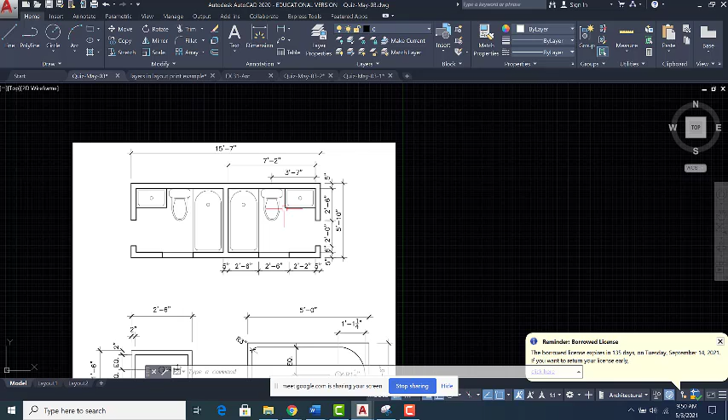Okay, so if I want to do this specific drawing, first of all, I spend a little bit of time to see which way is faster. Okay, to me, probably the fastest way is if I draw just a small rectangle inside, then I offset it outside. Why? Because I don't want to sit and calculate. I can calculate 7 feet 2 plus 5, but if I go with the inside, it's really simple.

See, 7 feet 2 is x, and y is, actually I have to calculate here, is 5 foot 10, but it's really simple. See, 5 and 5, 10. So basically 5 feet 10 minus 10, it's 5 feet. So the inside rectangle is 7 feet 2 by 5 feet. So I start the rectangle, so 5 feet, sorry, the x is first, 7 feet 2, comma, 5 feet.

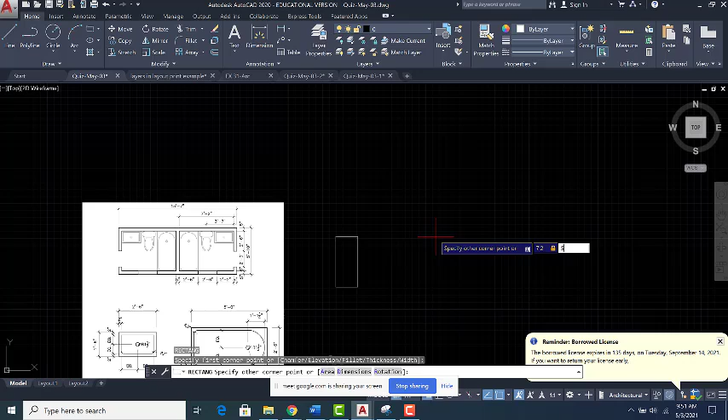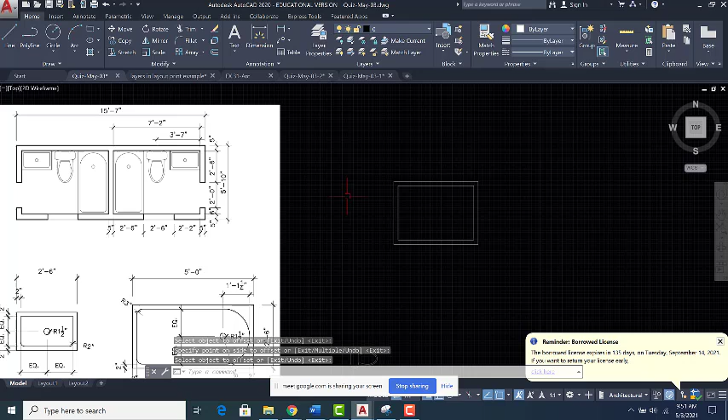You can draw it with line. If you draw it with line, it has some advantages, but it doesn't matter. I just did the rectangle. Then what I can do, I can use offset 5 inch, and I offset this one like that. So as you can see here, because when I want to mirror this thing, it's much easier if I draw the whole line.

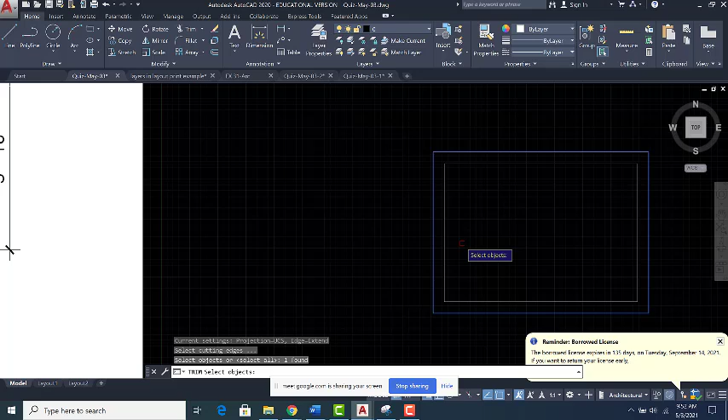Okay, so what I would do, I would delete this line. So trim, select this one as my cutting edge because it's polyline, everything is selected, accept the selection, and I just get rid of that part for now. Later on I delete one of this line too. So now I have the overall. Then what I have to do, I want to find this opening. How can I do that?

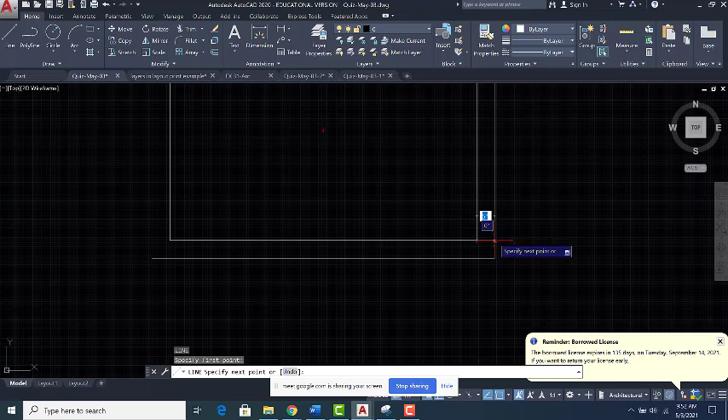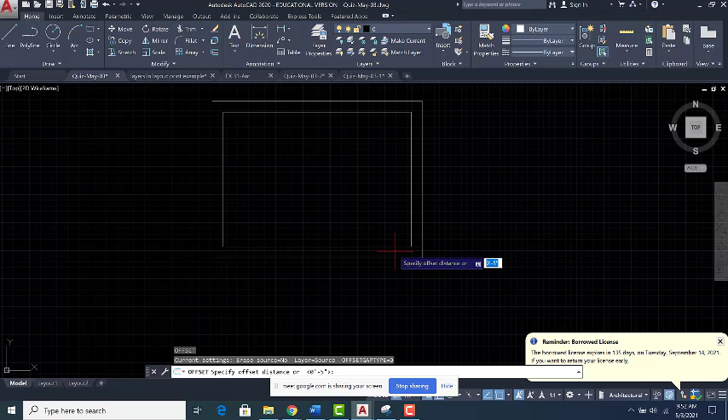Remember, we can easily draw a guideline here. Make sure, please guys, zoom in, grab the endpoint, make sure it's perpendicular, make sure the ortho is on for this part of the drawing. So I have this corner now. If I offset it 6 inch, I would have the start of the opening. Offset 6, I offset this one here. Press spacebar to cancel the offset, press spacebar again to start it.

So then the opening is 2 feet or 24 inches. Then I offset this one there. So see, I have the opening. Immediately I delete this one. I use TR, trim, and I select my cutting edge, accept it, and I get rid of this part. Then I go here. Again, to find this corner, I just draw a line.

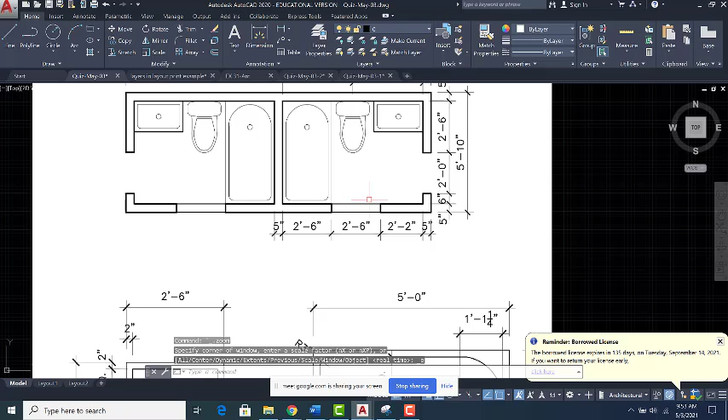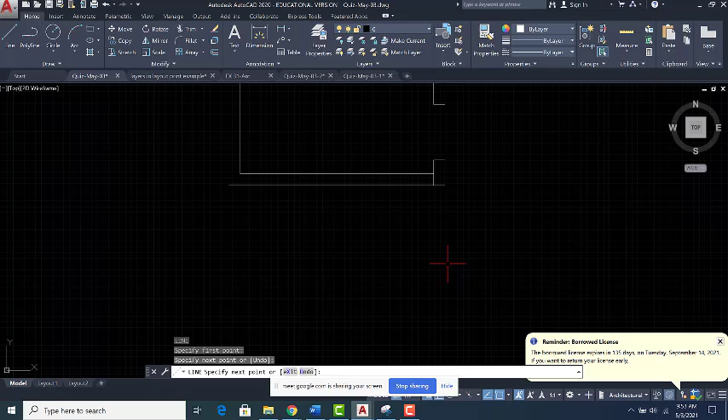See, because I used the rectangle, I cannot offset the line. If I did it with line, I can easily just offset the line and it gives me this one. But it's fine, it's pretty simple. I just draw a line from here, then I offset it. The first one is 2 feet 2, accepted, and this is this. Press spacebar to cancel, press spacebar to start it again. 2 feet 6, and here you go.

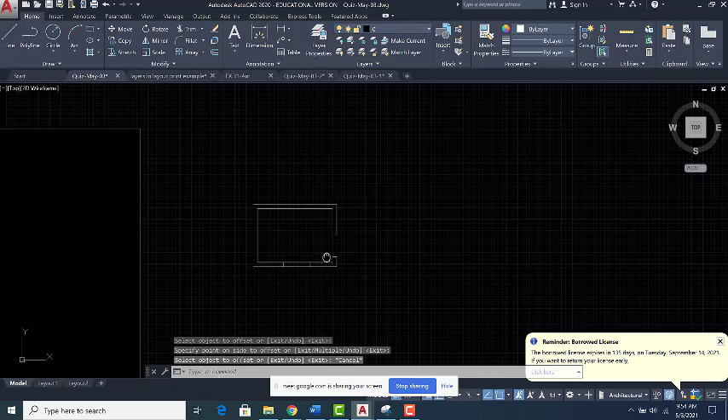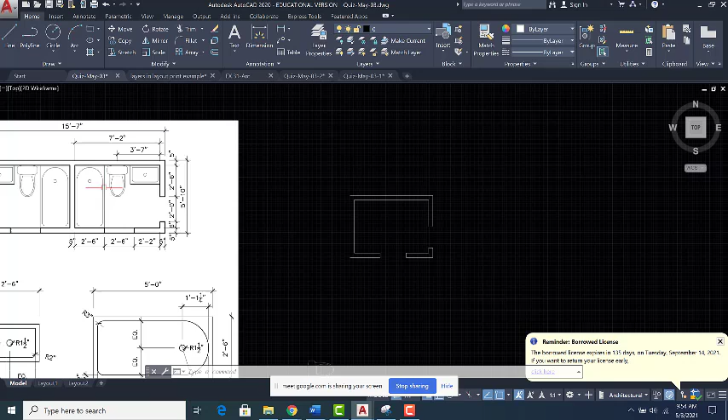So now I have the window, trim. See, I open the window to select the cutting edge, and I trim it. E, spacebar, and I erase this one. So I have my openings. Now I have to just draw these two parts. So I go here so I can see it easily. For this one, for sure, rectangle is the best.

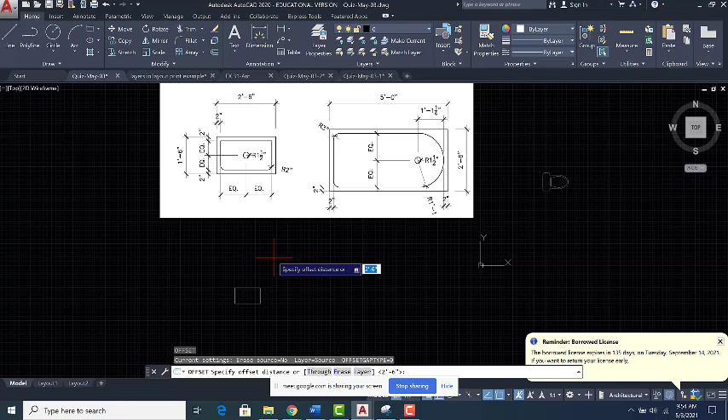The first number is x, so 2 feet 6, comma 1 feet 6. This is the overall. Offset 2 inch. So make sure your offsetting is inside because I did the outside. Then I have to use fillet to make these two arcs. So F spacebar. Remember, because I have a specific radius, I have to change the R. So I just type R spacebar, and I just type 2 enter or spacebar.

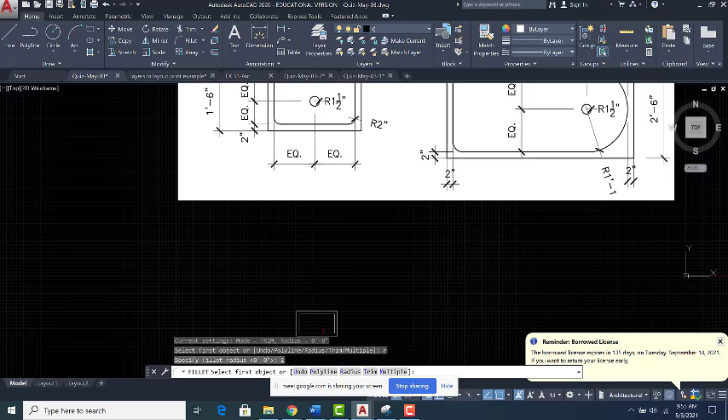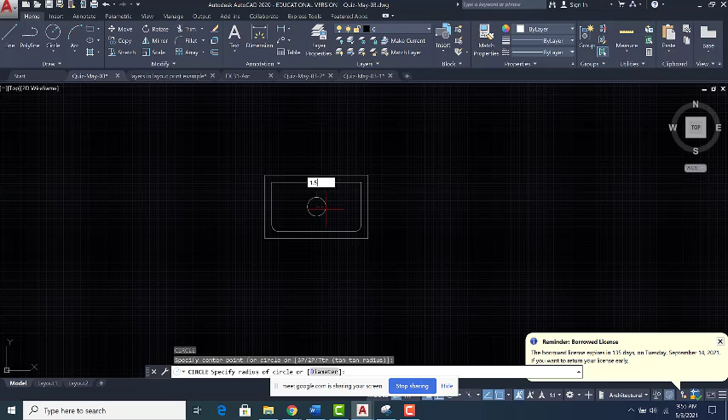Now because I want to do it more than once, it's better if I just select multiple. Then I can go ahead and select these 2 lines, these 2 lines. So I'm done with this. The only thing missing is the drain. The drain is 1.5. So C spacebar, and see I just move my hand here to find the center, 1.5. So I'm done with this. M to start the move, select the object, press the spacebar to accept the selection.

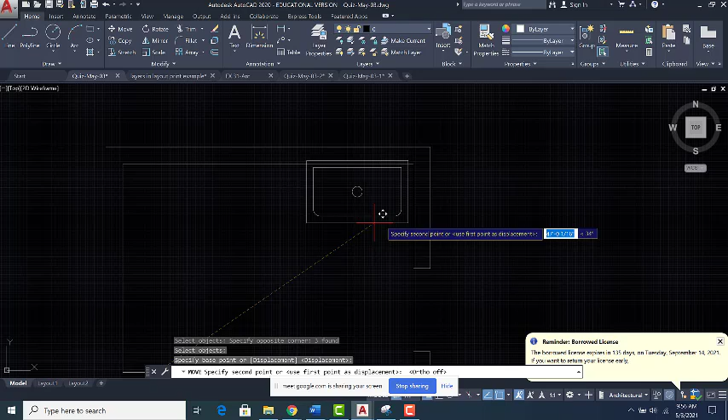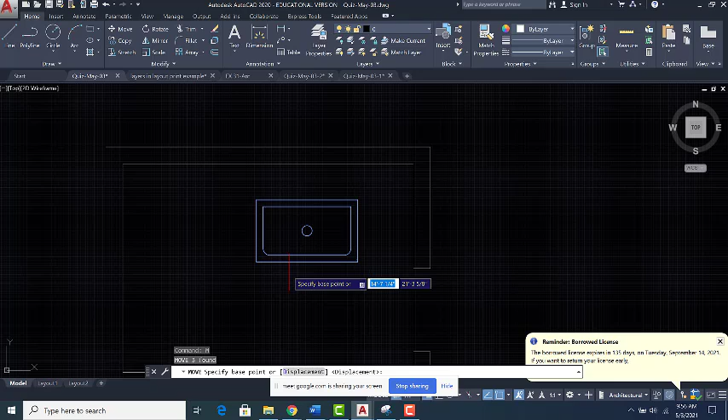See, this is crucial. Do not trust your eyes. Do not just grab it from here and try to place it somewhere. There is no way that you can place it. When you are moving any object, you have to select the right base point and destination point. What I did here, I select the object first, then I just type M, spacebar, so it makes it easier. There is no more select object. Then I grab the endpoint and I put it to the endpoint.

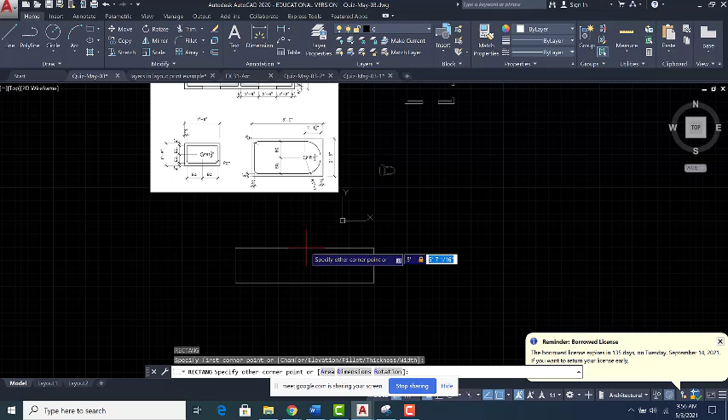So this is done. I go to make the bathtub. So rectangle again. This is 5 feet, comma, 2 feet 6, enter. As you can see, again, I have 2 inch on all sides. See, 2 inch, 2 inch. So what I can do, offset 2 inch, go inside.

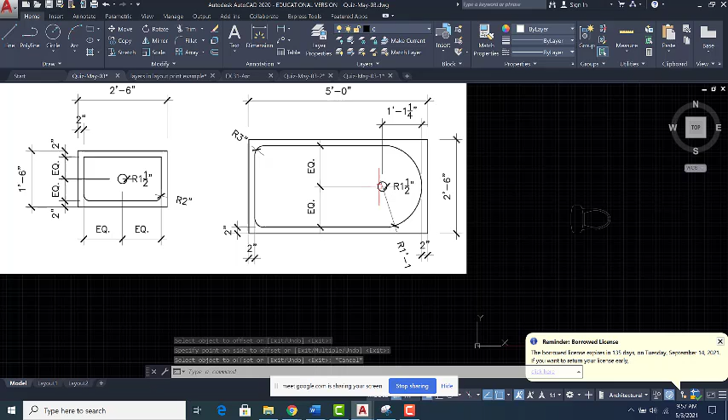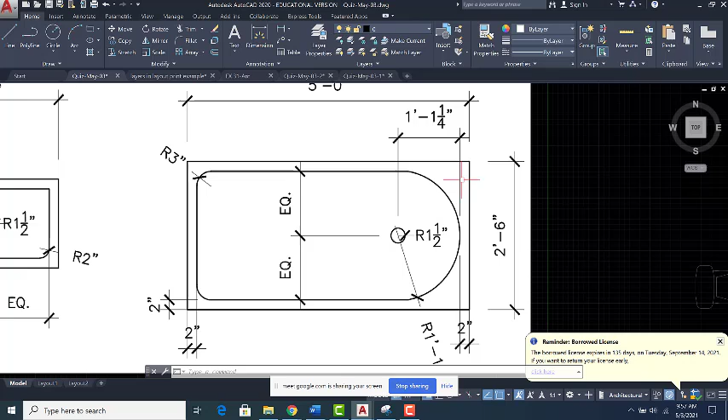Then what I can see here, see this, the drain and the center of this arc is the middle of this line. So I can just draw a line as a guideline. See, grab the midpoint and I just draw it like that. Then the next thing I need to find is the start point for the center. I know that the center is 1 foot 1 and a quarter inch from this point. So what I would do, I just draw a guideline. See, I usually draw it longer so it's easy to delete.

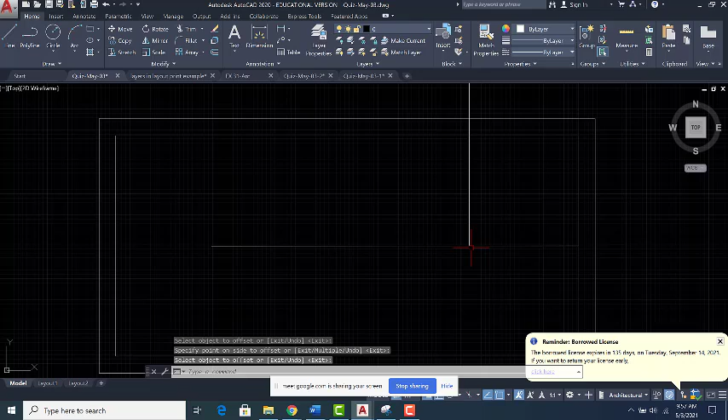Offset 1 foot 1.25 and I offset this one here. So this is the center for the circle. So C spacebar, I grab here, the first point is center and this is the radius. So now I don't need any of these guidelines. I delete them. Then I use trim.

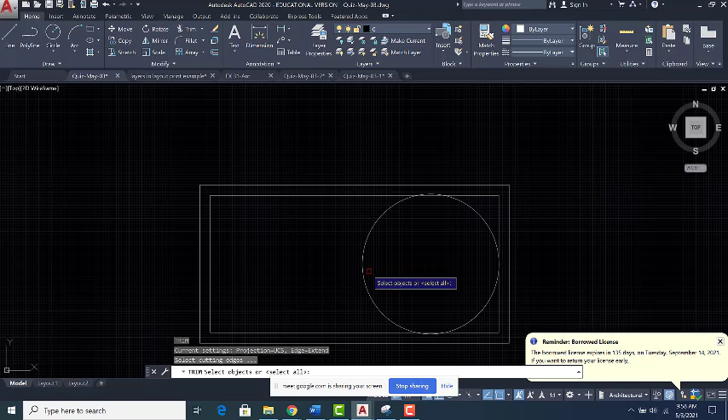So the cutting edge is this rectangle. Accept it and I just delete this part. I don't need this part and I don't need this part. So now I want to get rid of this extra part. The last command was trim. If I press spacebar, AutoCAD repeats it for me. So now this is my cutting edge. I press spacebar to accept it. Then I just go ahead and delete these 2 extra pieces.

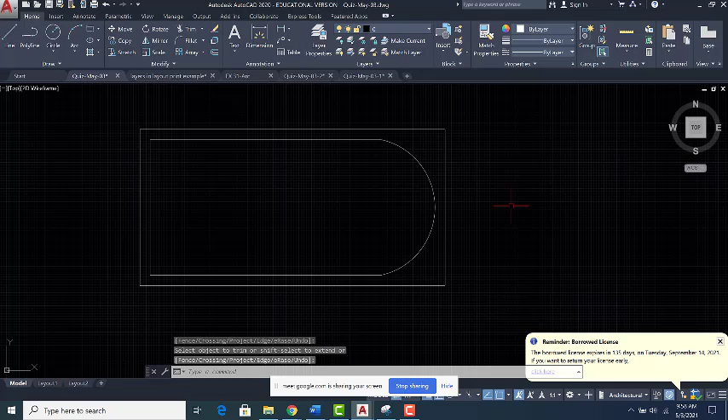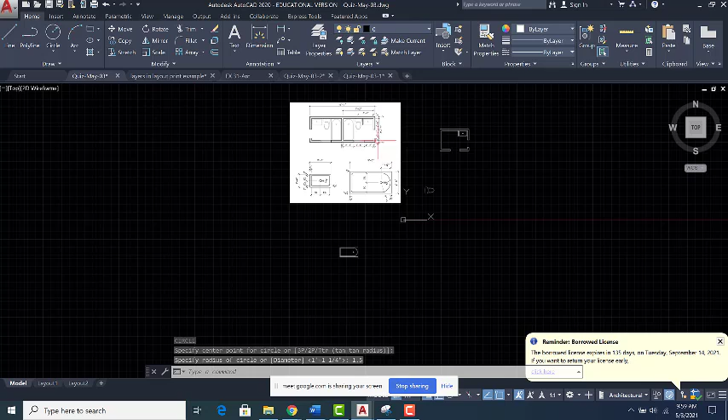I'm done with it. I just have to add the drain. So C spacebar. I place my hand on the perimeter of the circle to find the center of it, and 1.5, and this is the drain for this one. The only thing is I have to rotate it. So RO spacebar, select the object, press spacebar to accept it. So it doesn't matter where I select the center of the rotation, okay? I can even click anywhere.

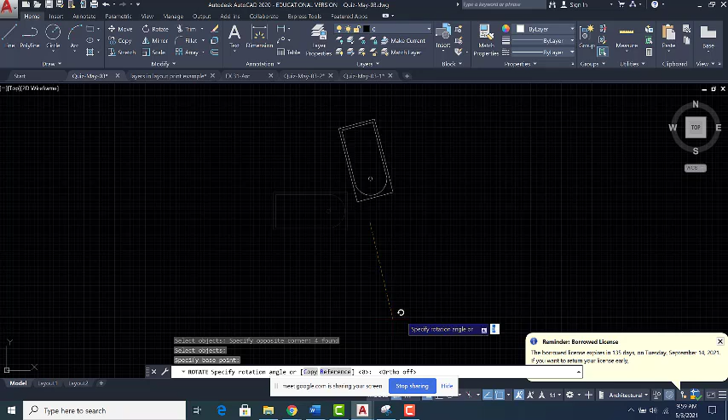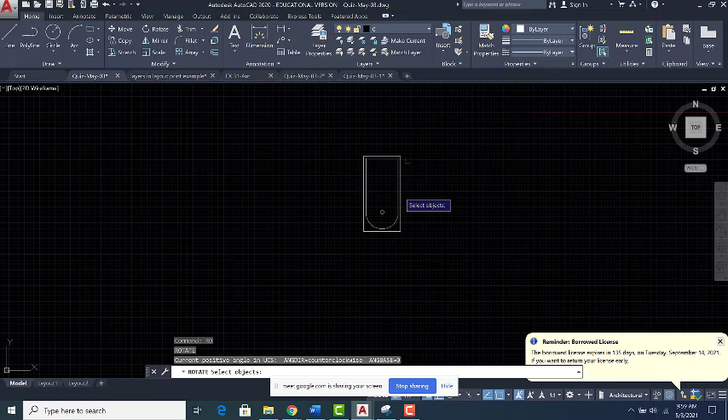The only tricky part is make sure your ortho is on. If your ortho is not on, there is no way that you can really place it in the right place. So ortho is on, then I have just 4 choices. And this is what I wanted. Did I do it right or no? Okay, so again, rotate, accept. So here you go. This is what I wanted.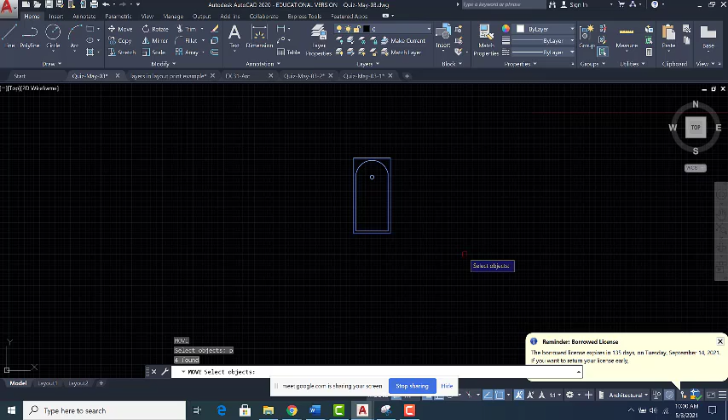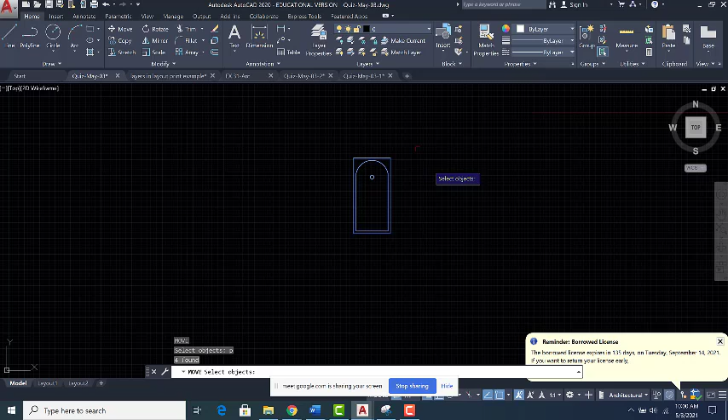M spacebar. Because this is the last thing that I have, I can just type P spacebar. Remember, when I'm doing any command, instead of selection, if you just type P spacebar, AutoCAD selects the previous selection. Here it doesn't matter because it was easy to select this one. But when the drawing is complicated and the selection is hard, P is really a time saver. I just type P spacebar, AutoCAD selects the previous selection for me.

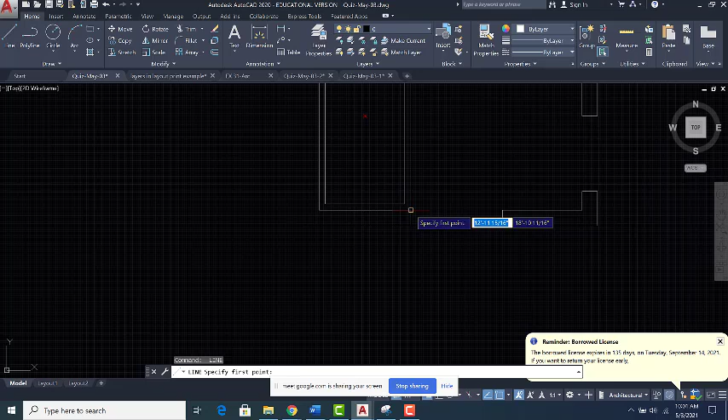Then again, the base point is crucial. End point to end point. Now I would turn off the ortho, otherwise I wouldn't get the result that I wanted. Okay, so everything is perfect now. The only thing is, first of all, I'm missing two lines here. So I just draw a line, and to repeat the line command I press spacebar again, from here to here, spacebar.

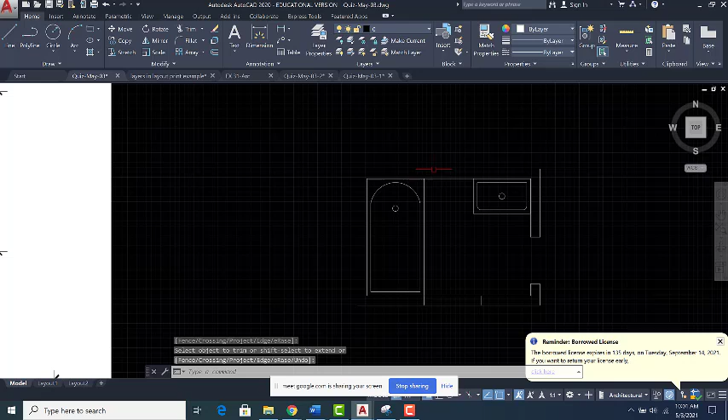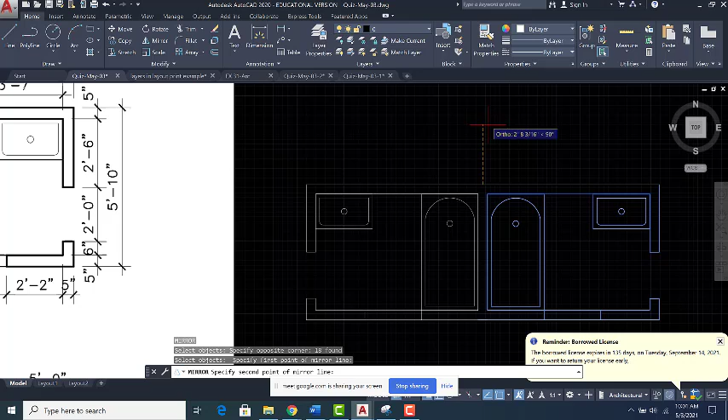And then you can do it in many different ways. You can just draw a line here 5 inches and then mirror that one, but I prefer to trim this part because I prefer to have one long line here. So I just type L, grab this point, make sure the ortho is on, and I just type 15 feet 7. Spacebar to finish the command, then MI, and keep in mind, I don't want to mirror this line. I'd end up having this line 2 times. The only thing that I want to mirror is this part. So then I grab the midpoint, make sure the ortho is on, and press the spacebar.

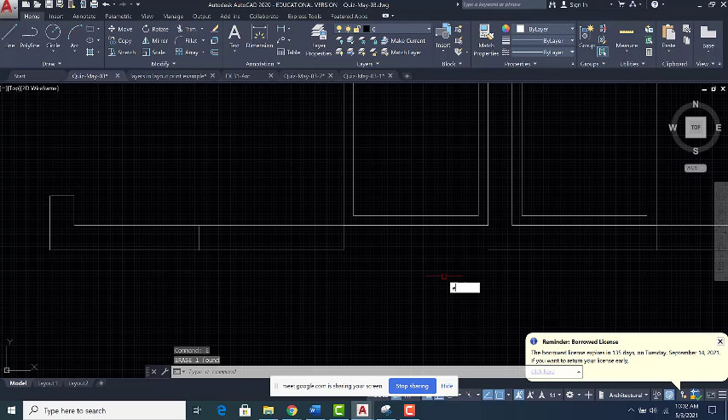Something that I want you guys to keep in mind: now it's fine in this exercise, but from now on, this is not something that we like in our final drawing, final project. We don't want to have any 2 or 3 piece lines, okay? You're gonna lose marks in your final exam if you have something like that. So here I would just erase one of them, and I just extend this one to here. So now everything is fine.

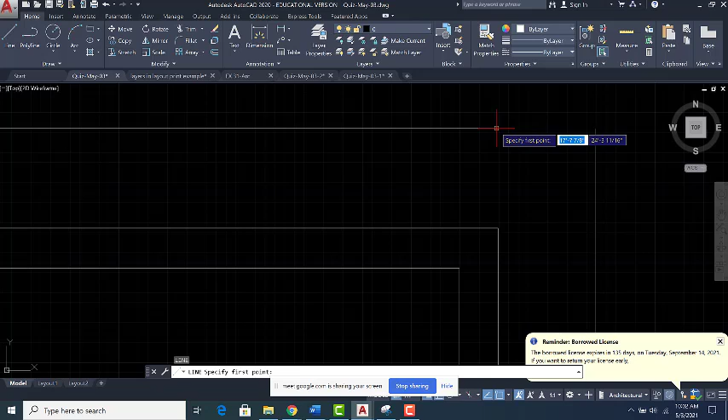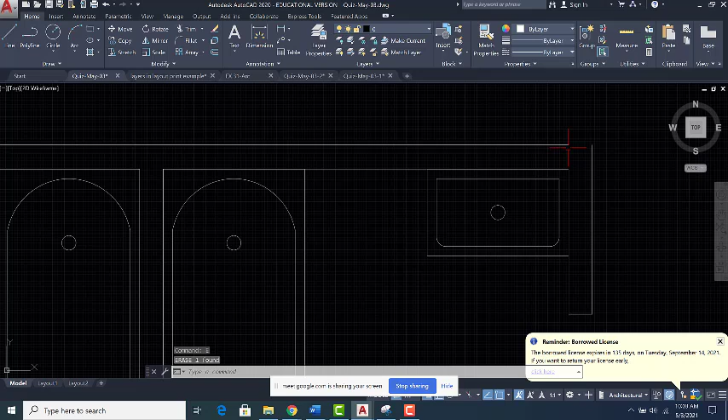And one trick that I use, because sometimes it happens, you just offset a line to use it as a guideline, then you forget about that line. What I would do, and I suggest you guys do for the final exam, if you just select everything, you can easily see this means that you have an extra piece of line here. So again, this is wrong. The good way is you just have one line extended from one side to the other side.

I use fillet in this case. I press shift to make it 0. If I don't press shift, see, it gives me this radius. With shift, I can override that one, and here you go.